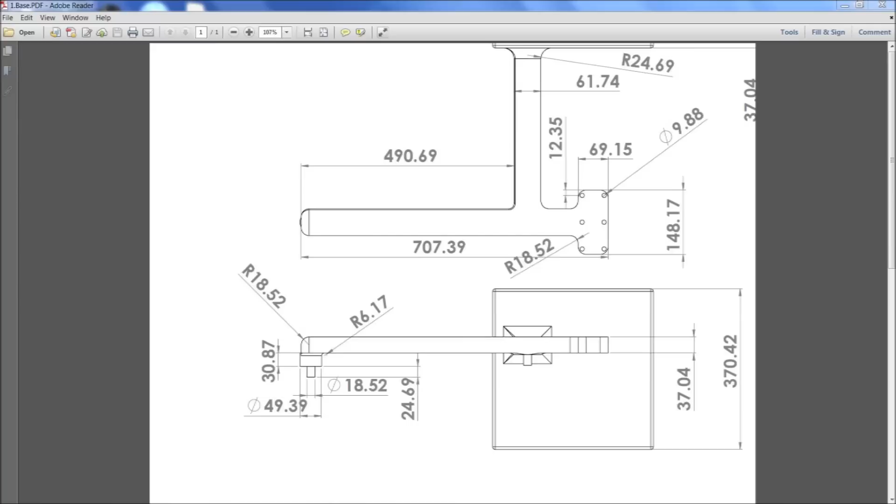Now we will sketch the first part of the 4-bar quick return mechanism, the base. First we will sketch the base here. Choose front plane, sketch, and select center line. Keep the height and width 300 by 300. Extrude it up to 30 mm. Now let's select fillet, keep 5 mm, select base and all sharp edges.

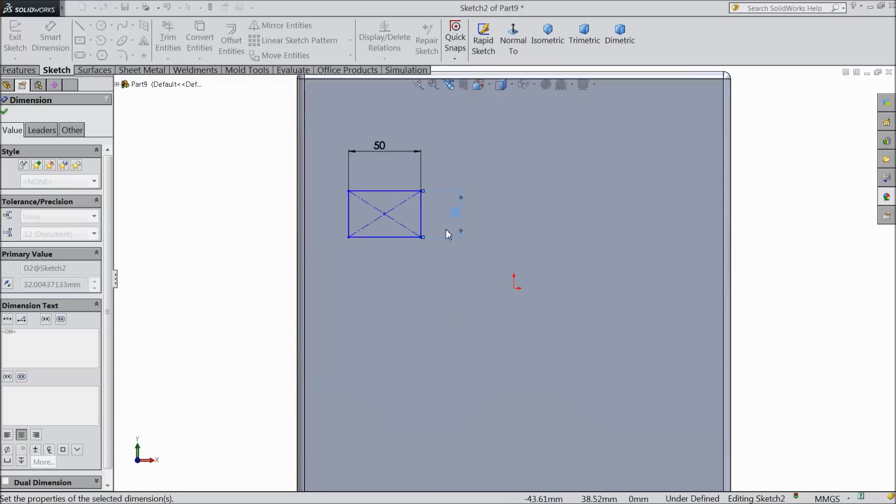Now select this face, sketch, select corner rectangle and draw one rectangle here, and assign the dimension, make it 50 by 30 mm. Assign the distance 60 mm from the origin point, and vertical distance 30 mm. Extrude boss up to 300 mm, we want length up to 300 mm. Let's see.

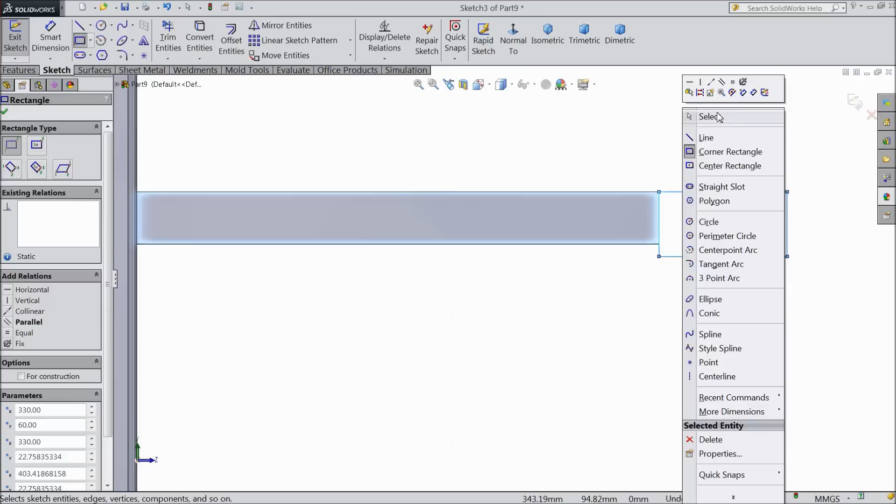Now select this face, sketch, select corner rectangle and draw one rectangle from this end. Now select this line and this line, make relation collinear. Let's assign the dimension, keep length 50 mm.

Now select extruded boss. Now in one direction, 397 and 403, and direction 2, 175.5 mm. This is our required dimension. Select OK.

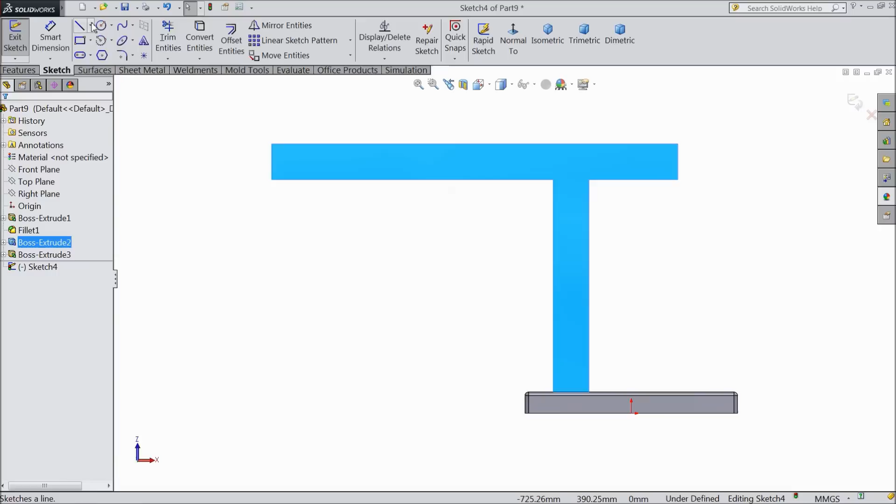Now select this face, sketch normal, select center line and find out the midpoint here. Okay, we found the midpoint, and meet up to outside, no problem.

And here also let's make a circle directly and make sure it's tangent to this line. Now assign the diameter 50 mm. Now select this outer line and circle, make relation tangent. Now extrude it up to 3 mm, only small.

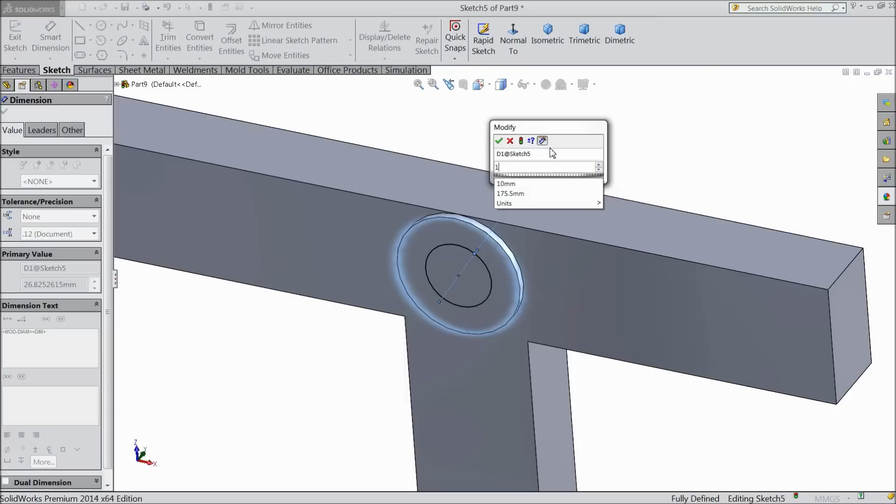Now again select this face, sketch, circle, just find out the origin point, this is the midpoint, and keep the diameter 15 mm, and extrude it up to 20 mm. This is our requirement.

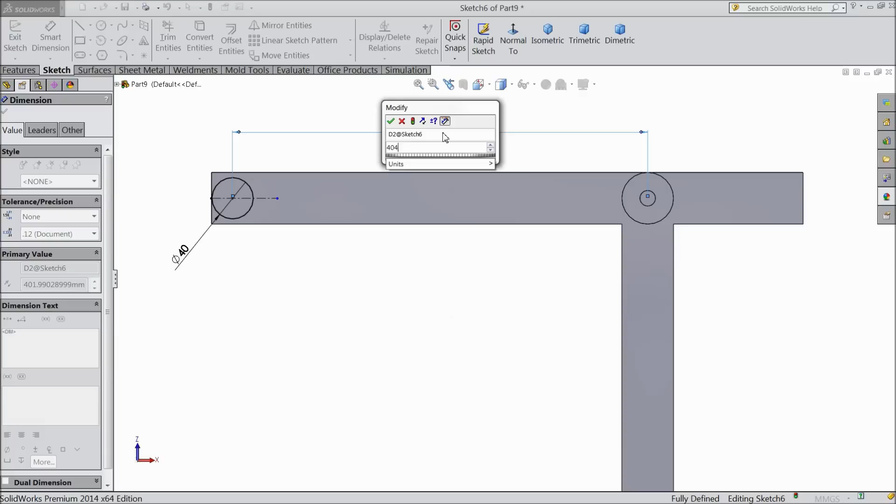Now select this face, sketch, select circle. We want to draw first, better to select a line and draw a line from midpoint, exit. Now select circle and draw a circle on this line and keep the diameter 50 mm, make it 40 mm. And make the distance 404.403 mm. This is our required dimension.

Let's extrude it up to 20 mm. Edit this feature and make it 25 mm.

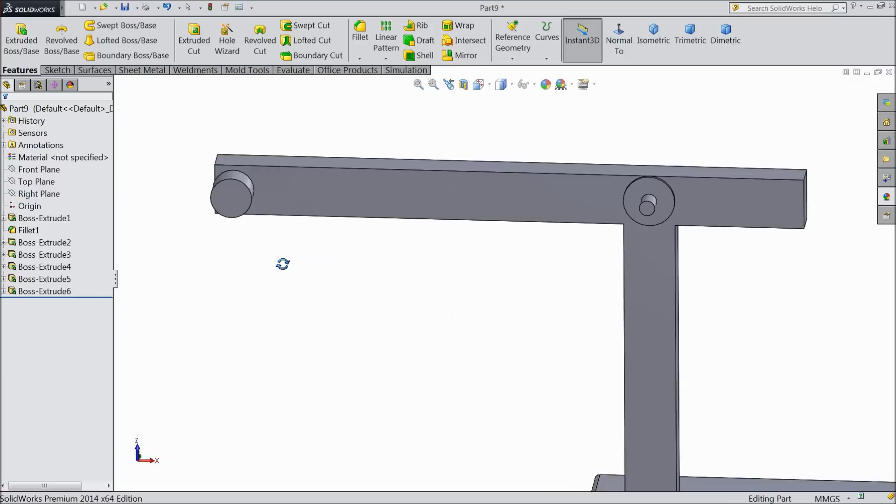Now select this face, and here we want to draw one extrude body. Keep the diameter 15 mm and select extruded boss. Extrude up to 20 mm.

Now select this top face, sketch normal, and here we want to create one corner rectangle up to this, and make the length 56 mm and width the same, 30 mm. Let's extrude it, and extrude up to 35 mm.

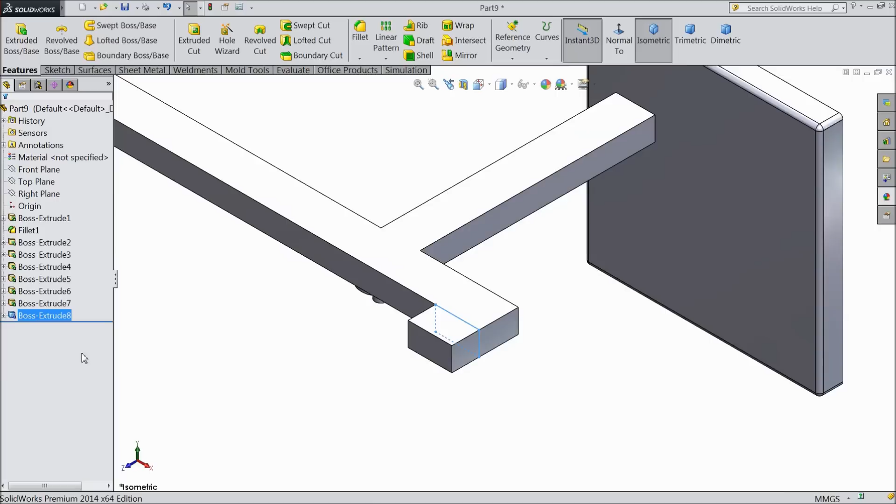Now select the same rectangle, again choose extruded boss, select offset here and make offset 50 mm reverse direction. Extrude 35 mm reverse direction. Now you can see it's going to extrude from this face. This face is created.

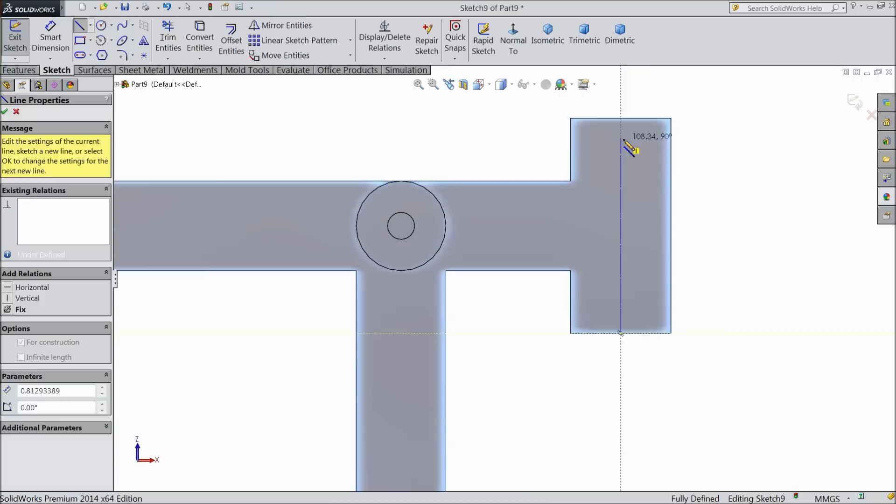Now select this face, sketch normal, draw center line first, assign the length 10 mm.

Let's make two circles. Keep diameter 8 mm. Now mirror this circle to the opposite direction. Now assign the center distance, let's make it 41 mm. Now choose linear pattern, select both the circles.

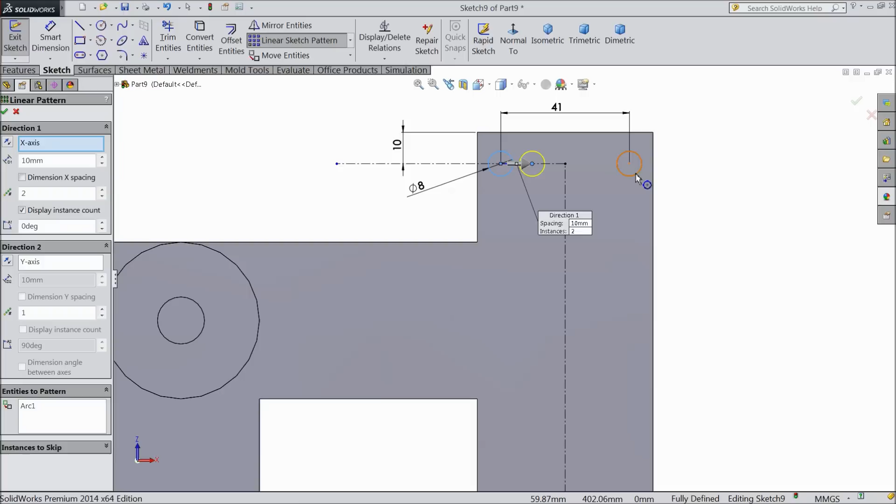X-axis keep 0, Y-axis make distance 50 mm, 3 numbers, and choose reverse direction. See, you can see here reverse direction, 50 mm the center gap, and 3 numbers. Let's cut it. We want to make a hole, so choose up to next. Now see the holes are created.

Choose fillet, select 10 mm and select all the edges. Just move and you will see the direction. That's it.

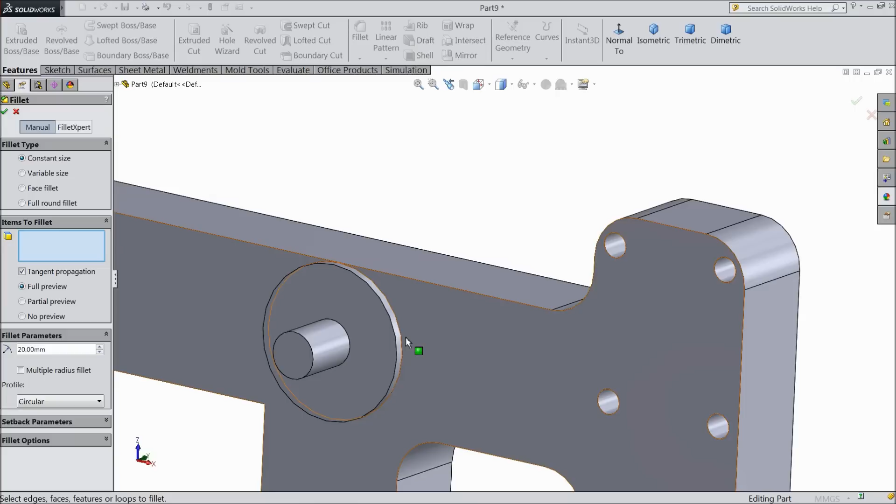Select 20 mm and select this edge. Again choose, make 20 mm and select this edge. Next opposite direction, see all four sides.

Again choose fillet, and this time select 5 mm and select this face.

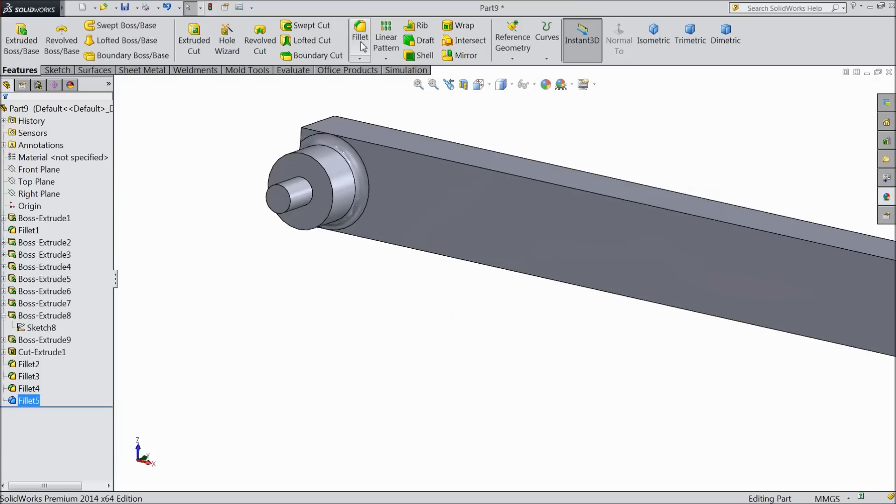And again choose fillet, keep 2 mm. Select 10 mm and select this edge also.

Keep 2 mm, select this edge and select the next opposite edge. Now we will select this edge, so keep 15 mm. It is not suitable for this face, so just select the edges.

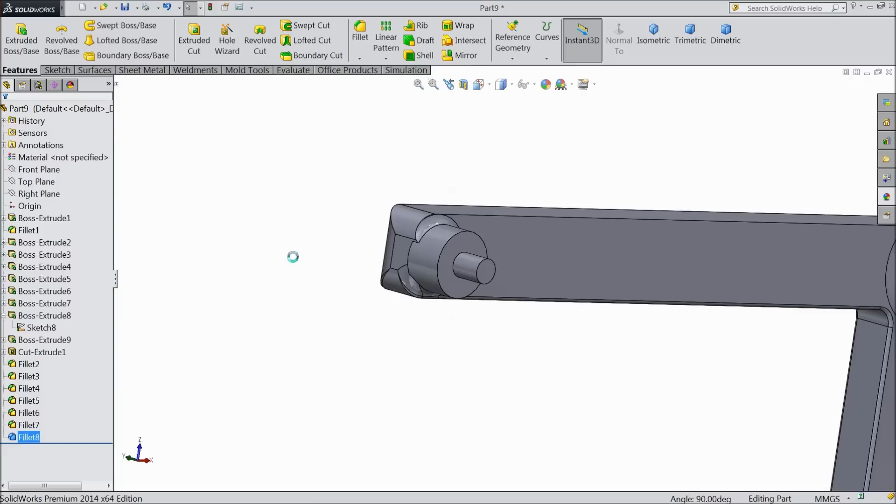Okay. That's it. So now this is our body for the 4 bar quick return mechanism. Let's add color so it will be easily identified. Okay. Now see, this is the body for the mechanism.

Now let's save as, create a new folder on the desktop, new folder, 4 bar quick return mechanism. Now save the first part as base. Okay.

Now before moving to the next part, we want to rescale because this is not the exact dimension for our project. Let's go to insert feature and make scale. Choose centroid, uniform scaling, and the scale is 1.2347.

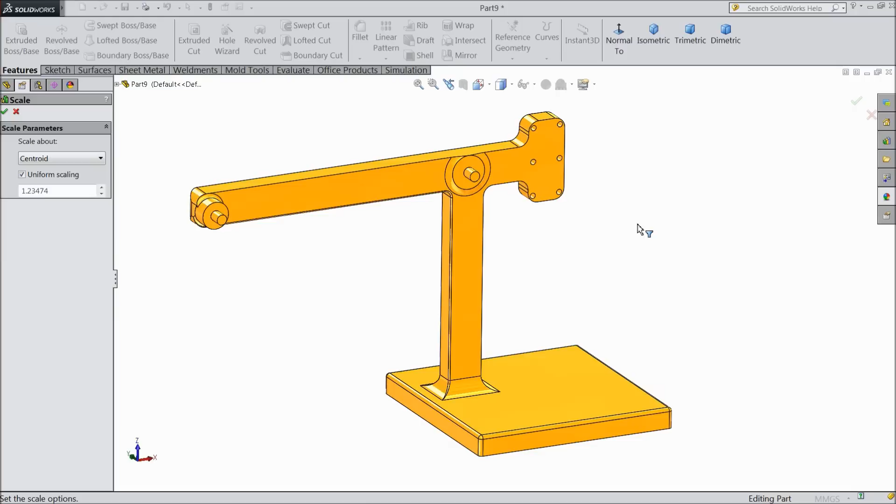Why do we keep this? If we don't, all dimensions will be in decimal points, so it is difficult to calculate every time. Okay, now save it. So now our geometry is scaled. Let's move to the next part.

Let's make the second part of the 4 bar quick return mechanism, the cylinder. Choose front plane, sketch, and for the cylinder we will first draw a circle and make the diameter 80 mm. Okay, and let's extrude it. Extrude up to 260 mm. This is the length of our cylinder.

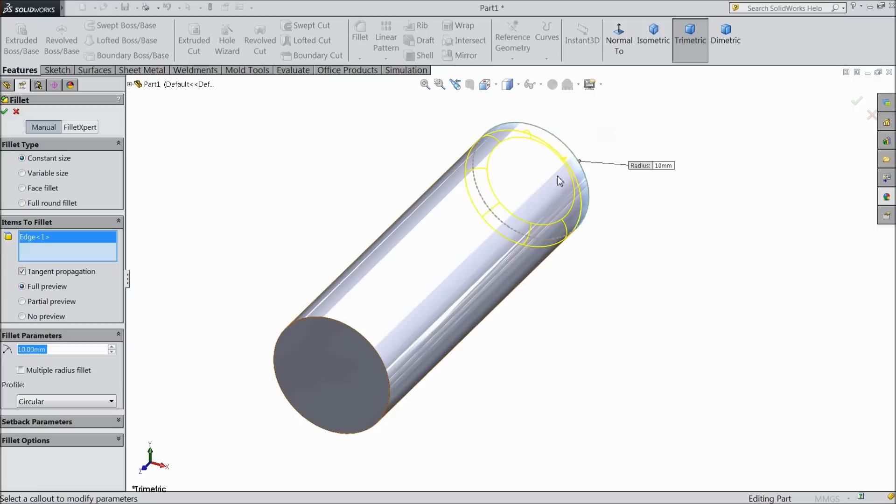Okay. Now choose fillet. Keep 10 mm and select the back surface only. Okay. Now we will choose shell. Keep 2 mm thickness. Select the front face. Okay. Now this is our cylinder. We will make it transparent. Or save it as it is.

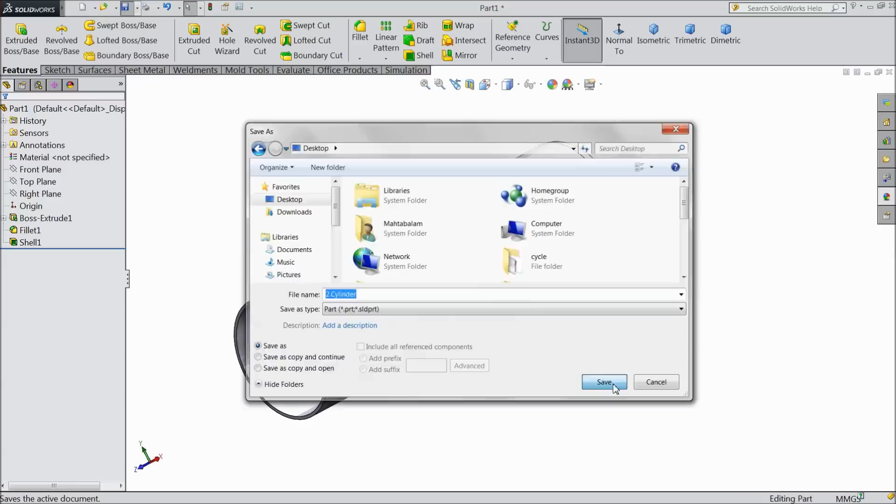Cylinder. Cylinder, this is part 2. Okay. Now let's go to the next part. In assembly we will make it transparent.

We will make the third part, the flywheel. So select front plane, sketch, draw a circle, select this inside circle, construction geometry, 140 mm and the gap 6 mm. We need this circle inside. Select extruded boss and choose mid plane 20 mm.

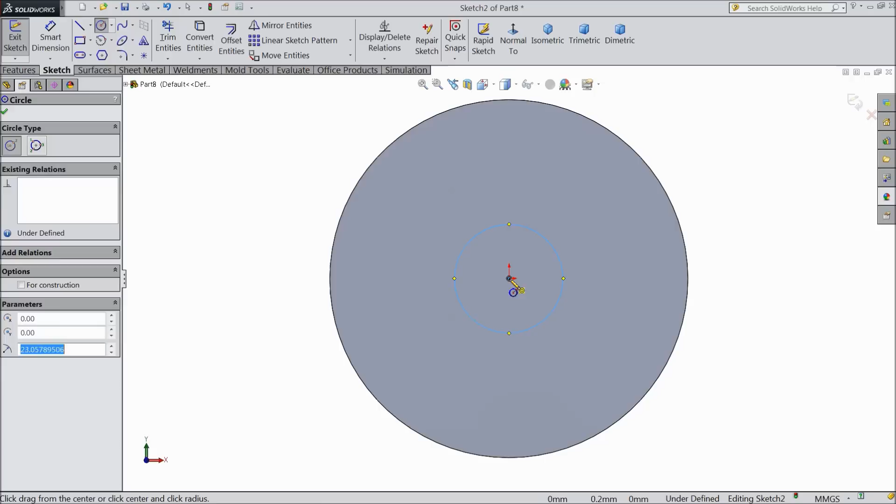Okay. Now select this face, sketch, normal. Draw two circles and keep the diameters 128 and 40 mm. Now select extruded cut. We want to cut inside up to 5 mm. Okay. Now just mirror this cutout. Select mirror and mirror about the front plane. It's going to mirror this.

Select this face, sketch, and draw one circle here and make the diameter 15 mm. Okay, and cut. Let's cut through all. Okay.

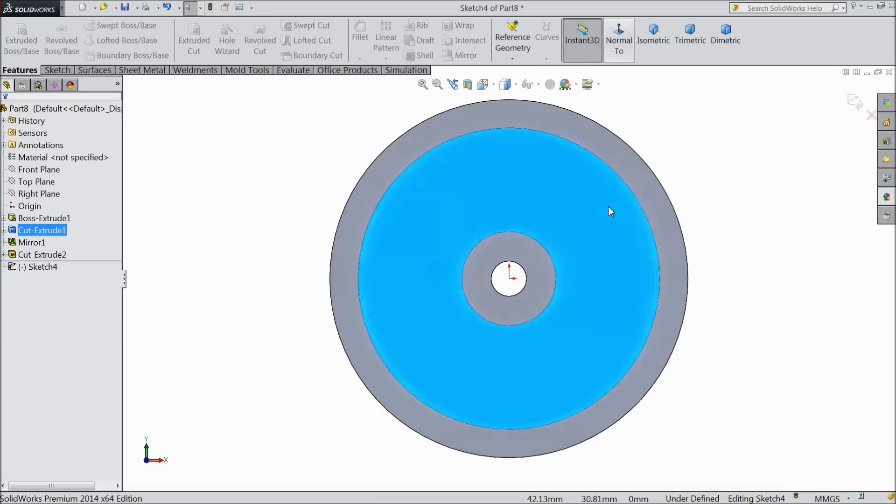Now select this face, sketch, normal. Draw a vertical center line. Select circle and draw two circles. Make sure it is tangent with this, and here also make sure it's tangent. Exit. Now let's add dimensions. Keep the small diameter 12 mm and the bigger one 24 mm. Okay. Now select this circle and this circle, make relation tangent.

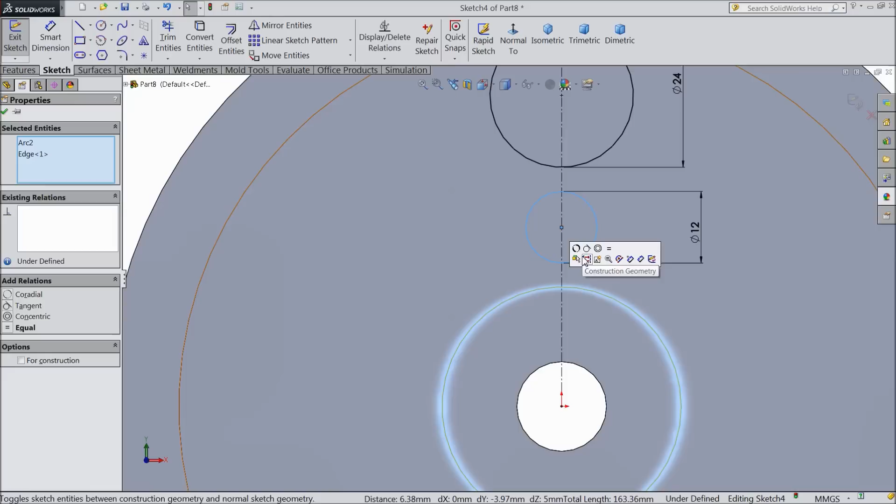Just like here, it's okay, it's coincident, or you can make the relation tangent. Okay. Choose a line and connect with this line. Exit. Select this point and this line, make relation tangent. It's already tangent. Here also it's tangent. So choose trim entities. Select these parts. Okay, let's mirror first. Mirror this line to the other side. Okay. Now choose trim entities and trim these outer lines.

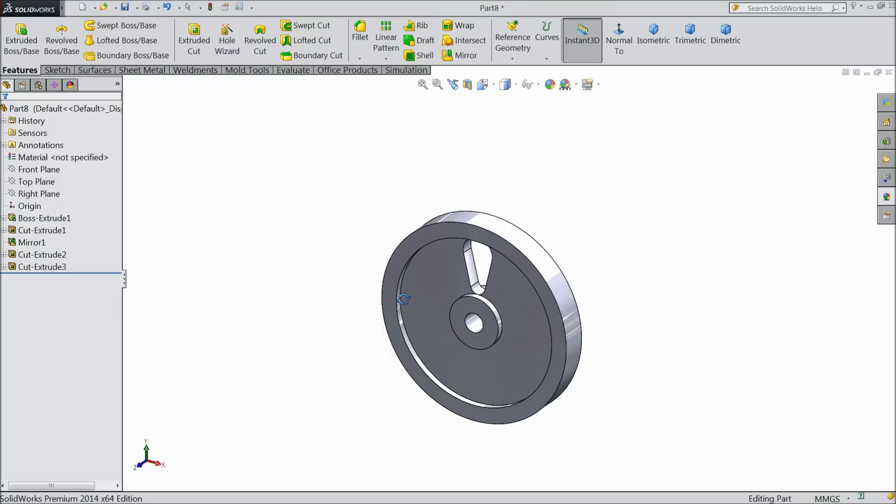Okay. Now let's extrude it. Extrude cut and choose up to surface. We will select the back surface. Okay. Now we will use circular pattern to make many copies. Select this cutout and select any axis, this axis. We want 8 numbers. Okay. Now see.

Now choose fillet. Keep 5 mm and select this edge and the same in the opposite direction. Okay. Now again choose fillet, keep 2 mm and select, okay, let's select this mid. So it will select through all. Okay.

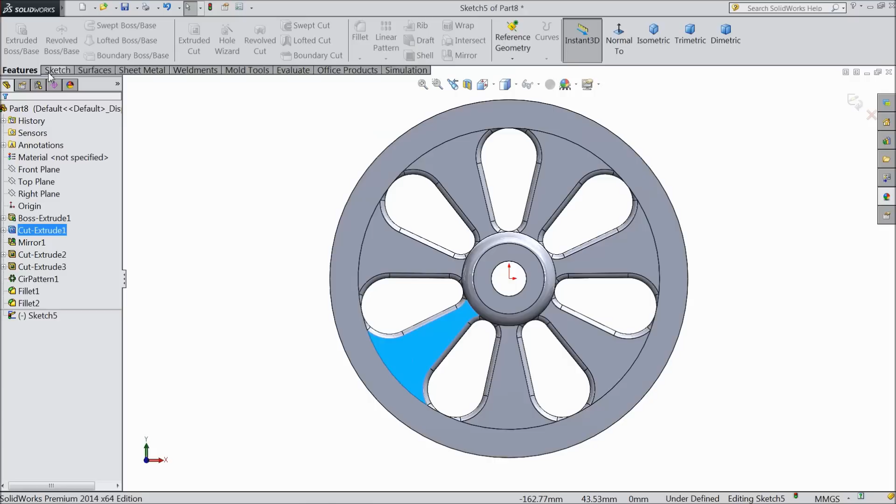Now select this face, sketch, normal, and we want to extrude something here at this angle. Select center line and draw one center line. Exit and let's make the angle 12.5 degrees, or make it 12 only. Okay. Now select circle, draw one circle and keep the diameter 50 mm and make the center point from origin

80 mm. Okay. Now select this circle and choose convert entities. Choose trim entities, delete the outer circle, then delete this line. Now this part we want to extrude, and select up to surface. Select this surface. Okay. Now see here.

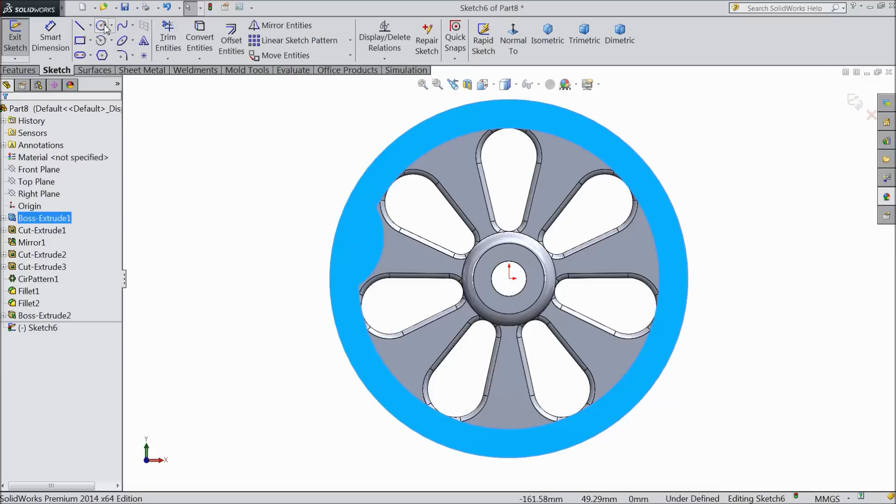Select this face, sketch, normal. The same, draw one center line and make the angle 12 degrees. Draw a circle here and make the diameter 11 mm and the distance from the origin point 70 mm. It's quite outer, so make 65. Actually we need it outer, so better to make 70 mm.

Okay, and extrude it up to 22 mm outside. Okay. Choose fillet, keep 2 mm. Select this outer face, this inside line, and the same in the opposite direction also. Okay. Now our flywheel is ready.

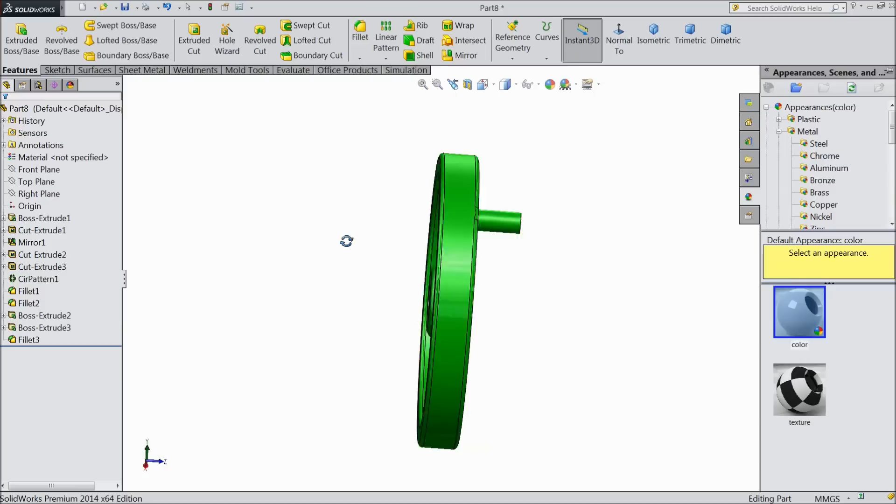So just assign some color to this flywheel for identification. Okay. So this is our flywheel. Now save as part number 3, flywheel. Okay, and don't forget to scale it. Scale the whole geometry 1.2347, centroid. Okay, now save it. Let's move to the next part.

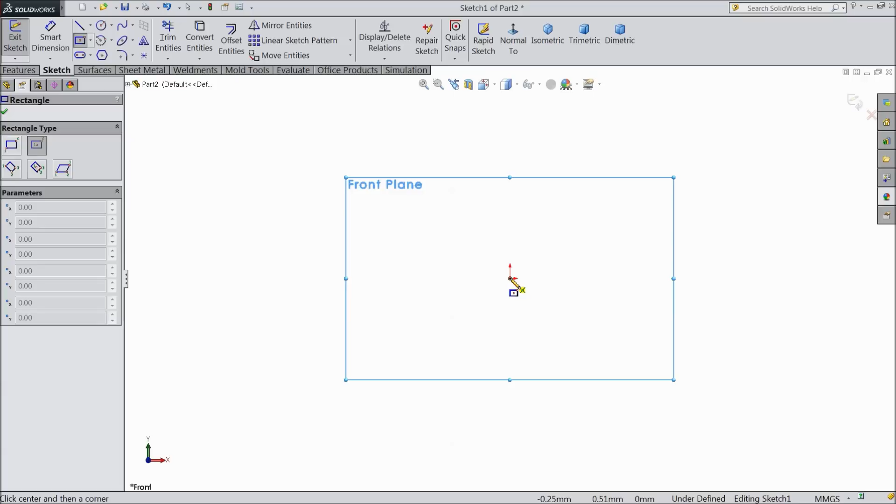Let's make the slider for the mechanism. Choose front plane, sketch, and draw one center rectangle and keep the horizontal length 15 mm and the vertical 11 mm. Now select circle and draw one circle at the midpoint. Keep the diameter 7.5 mm.

Okay, now let's select extruded boss, first choose mid plane and extrude up to 15 mm. We want 15 mm length. Okay, now choose fillet, keep 0.5 mm and select all the edges.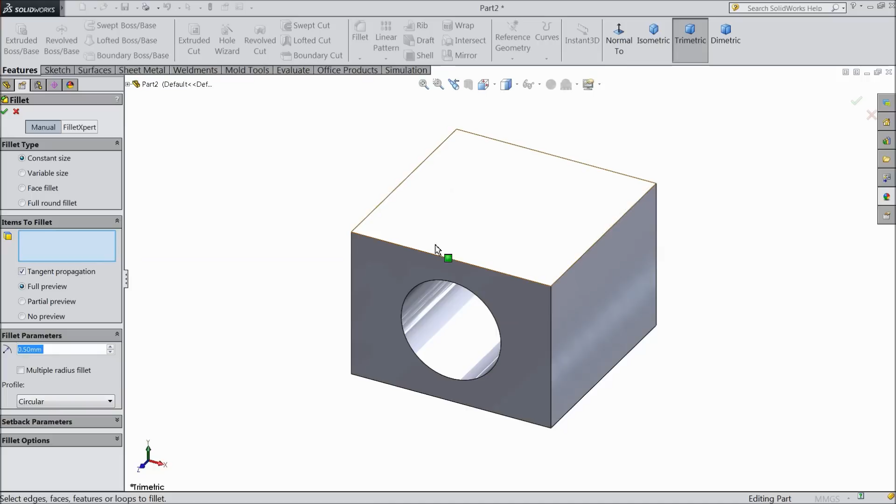Okay, now we will scale it, because for our mechanism this is not the exact dimension. We want it a little bigger, so just avoid point dimensions. Just go to Insert and we will find Scale. Choose centroid, uniform scale. Now we want to make it a little bigger, so select 1.23474 mm.

Okay, that's it. Now let's add some color so it will be identified while we are doing the assembly. Give it brass. It is quite okay. This is better. Now save as slider. Okay, now let's move on to the next part.

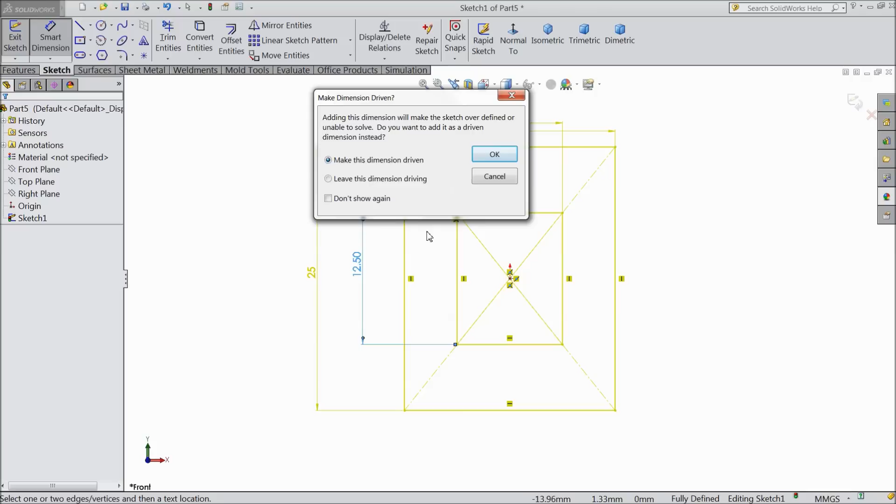Now we will make the next part, the slider slot. This is the fifth part. So choose front plane, sketch, select center rectangle and draw one rectangle. Draw two rectangles actually. Let's assign the dimensions: 20 by 25 mm, 10 mm, cancel it, and remove this geometry. 15 mm. That's it. This is our requirement. Okay.

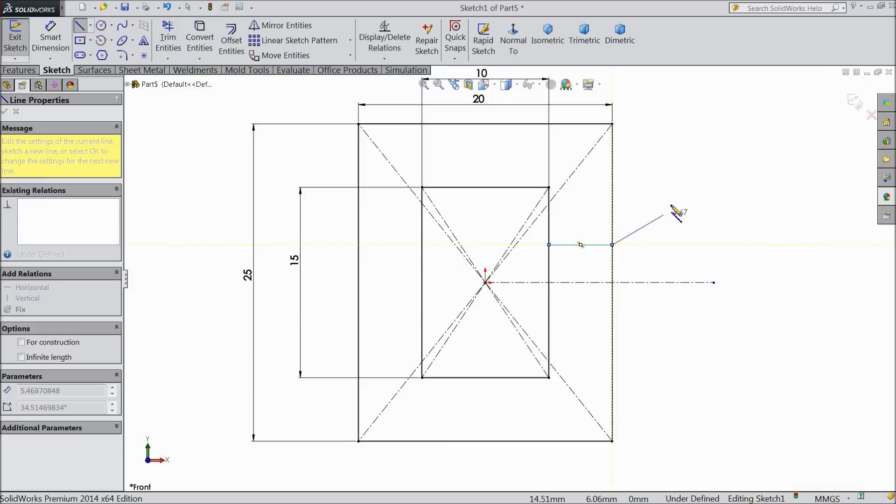Now choose line, center line, and draw one horizontal line. Make sure it is horizontal. Okay. Now connect a line from this point to this point. Exit. Now let's define the gap: 3.75 mm. Select mirror and mirror this line about this construction line. Choose trim entities and delete these inside lines. Now this is our required shape.

Let's extrude it. Select mid plane, and the length we want is 200 mm. Okay. We will assign some color. Okay.

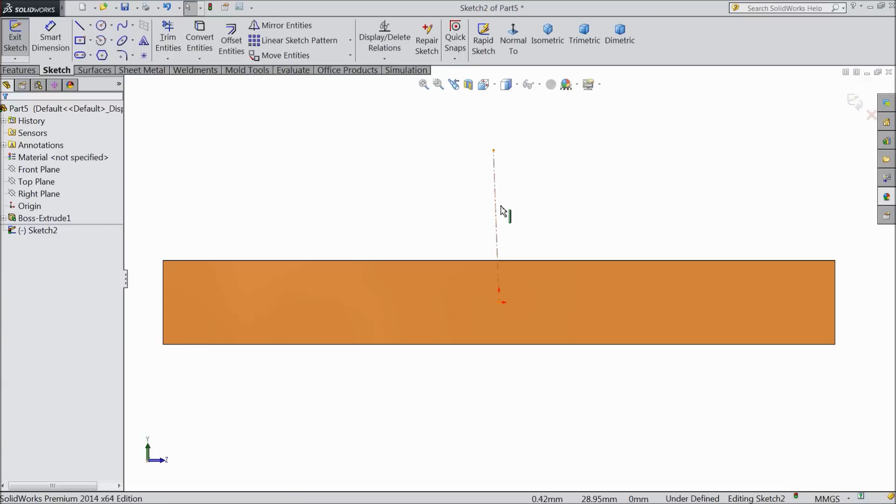Select this back flat surface, sketch, and here we will create some geometry. First draw a center line. Make sure it is vertical. Select corner rectangle, not center. Exit. Now select these outer lines, this line, center line and this line, and make the relation symmetric. Now let's make the dimension 15 mm and keep the height 8 mm. Okay. Select this line and choose it as construction.

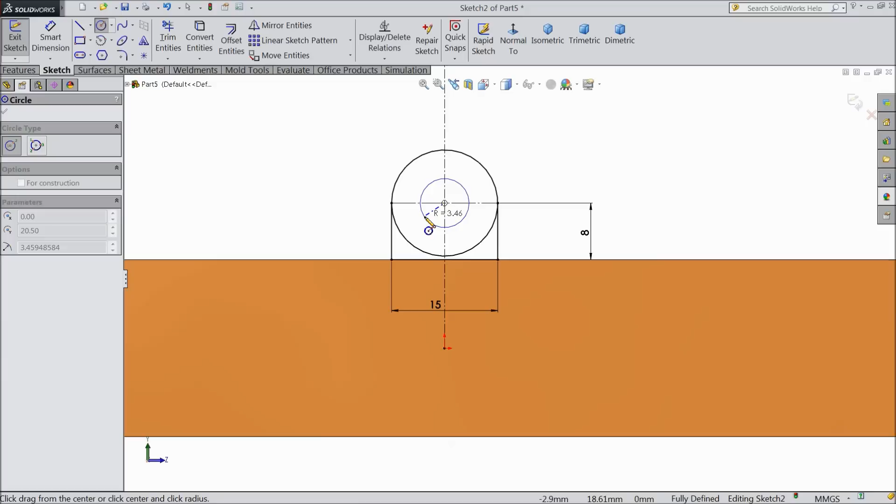Circle: draw a circle up to this line, again draw one more circle, and keep the inside circle diameter 8 mm. Okay. Select trim entities and delete these inside circles. Okay. Let's extrude it. Extrude up to 10 mm, but make sure it is in the reverse direction. Okay.

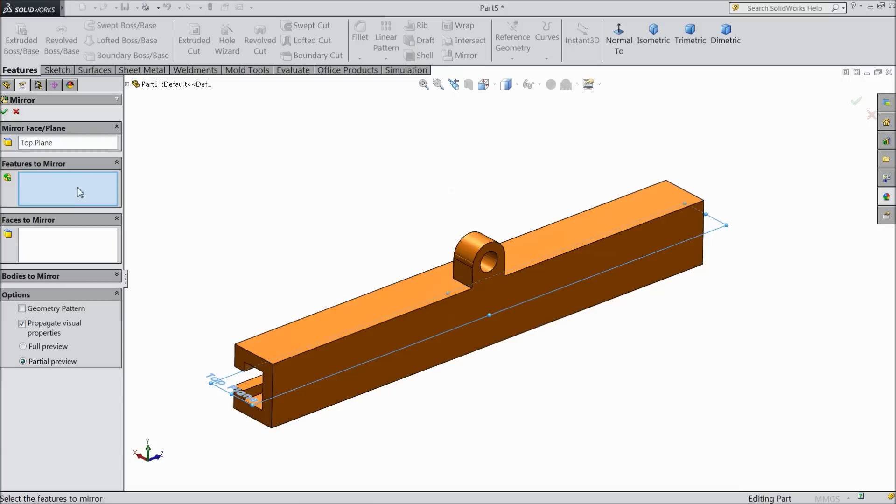Now choose top plane, and we want to mirror this extruded part. So select mirror and select here our Boss-Extrude2. Okay. Now select linear pattern. Select this axis. We want 50 mm, two instances, Mirror 1. Select OK. Again choose linear pattern. Select this axis and here clear. Select Mirror 1, reverse direction, 50 mm, two instances. Select OK. Now see, this is created.

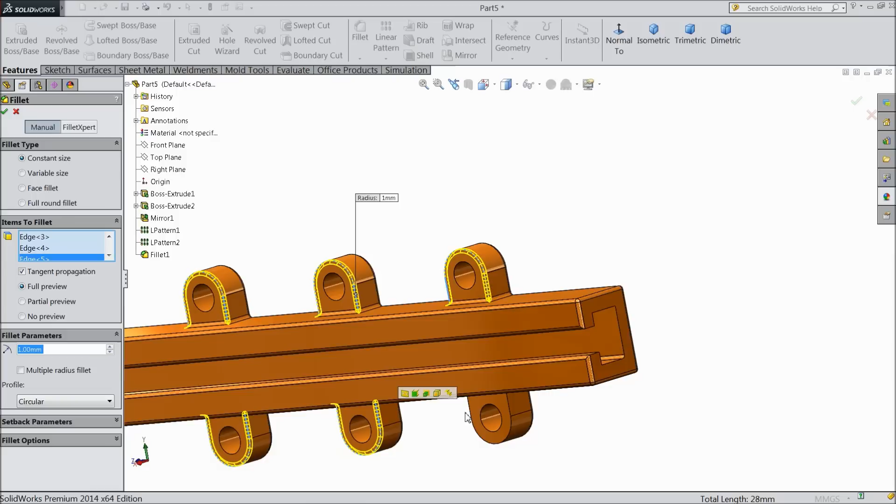Now let's select fillet, keep 1 mm and select all the faces. We want this face, this face, we want both front faces. Select OK. Again choose fillet, make it 1 mm and this time select all these edges. Selecting only edges or not, it's up to you.

So this is the slot for the slider's movement. The slider will move inside this slot. So just save it: slider slot. Okay. Now we will rescale this. Keep 1.23747. This is our standard uniform scaling. Okay. Now save. Let's move on to the next part.

Now we will sketch the sixth part of the mechanism, the ram. So select front plane, sketch, choose corner rectangle, draw one rectangle and keep the dimension 10 by 15 mm. Okay, and extrude it. Keep mid plane. And make the length 400.36 mm. This is our requirement. Okay.

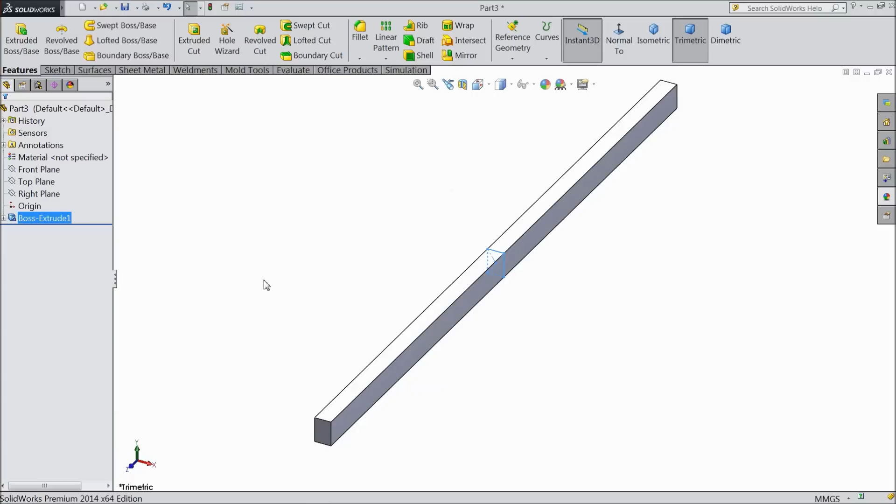Now select this face, sketch, normal, and here we want to draw one circle. So just draw one circle from the midpoint. Keep the diameter 7.5 mm and extrude it up to 30 mm only.

Okay. Now we want to scale it. This is not actually our scale. So just go to Insert, Features, Scale and make it 1.23747 uniform scaling. Okay. Now it's getting a little bigger.

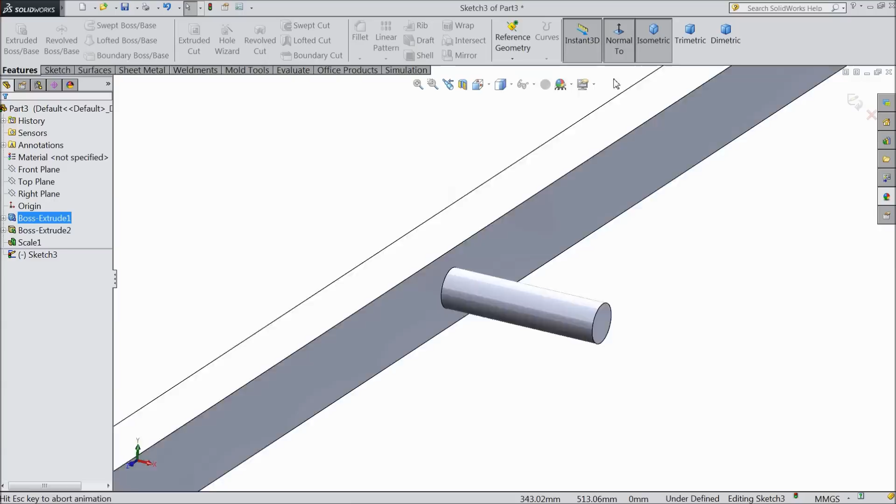Now select this face, sketch. Now here we want to create one circle and keep the diameter 76 mm. Okay. Now let's extrude it. Extrude up to 20 mm. Okay. That's it. Select front plane. Let's mirror it. Mirror, and select this extruded component. Now it's going to be mirrored here. Okay.

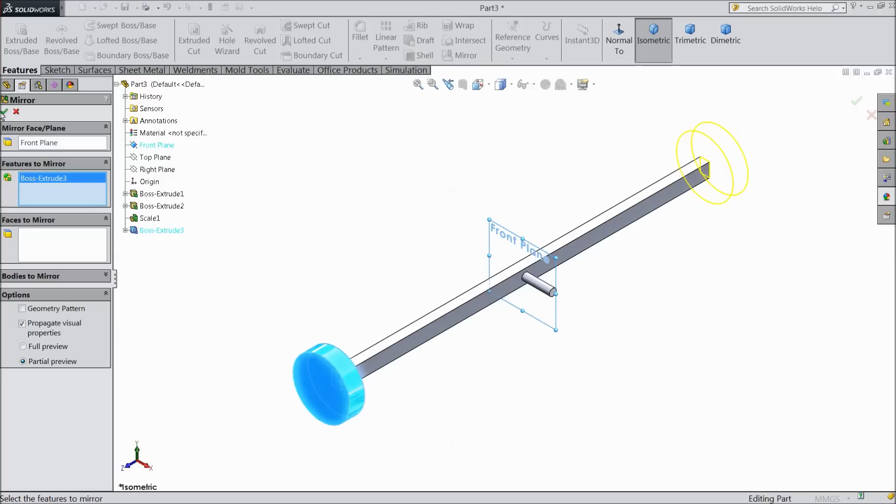Now let's assign color to the whole geometry. We will assign a better yellow color. Okay. So now this is the ram. It will move inside both the piston or cylinder. It works as a piston. We will see in the assembly. Now save as: part number 6, ram, four-bar quick return mechanism, save. Let's go for the next part.

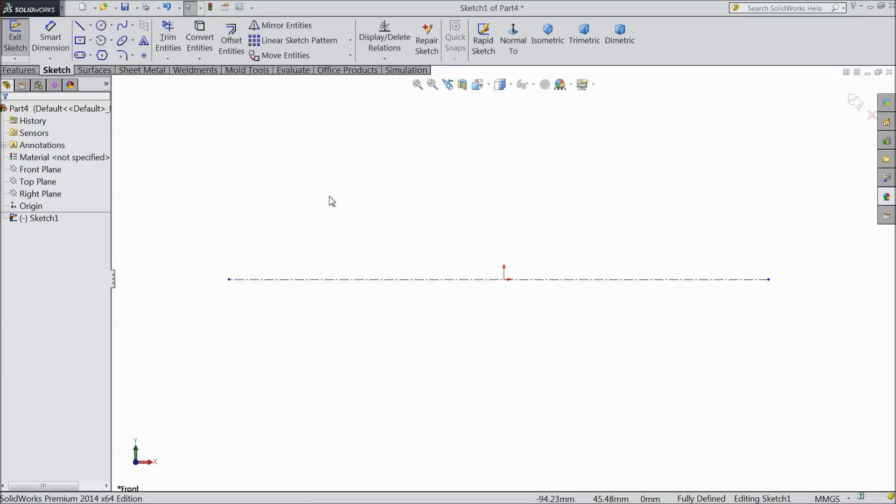Now we will sketch part number 7, the slotted lever. So let's select front plane, sketch. First draw one horizontal line just passing through the origin point. Now select here straight slot and create one slot. Okay. Exit. Now select this line and this line, equal, meaning both slots have the same dimension and same length.

Now select circle and draw one circle and keep the diameter 30 mm. Okay. Now select a line up to here.

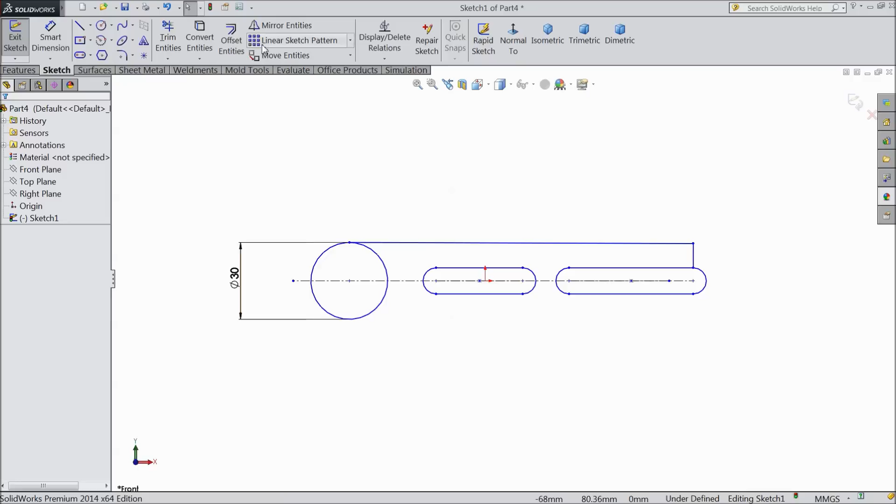Exit. Okay. Now select this line and make relation horizontal. Just mirror this line, mirror about this point, and here select this line also. Okay. Now choose trim entities. Okay, this is our exact required shape.

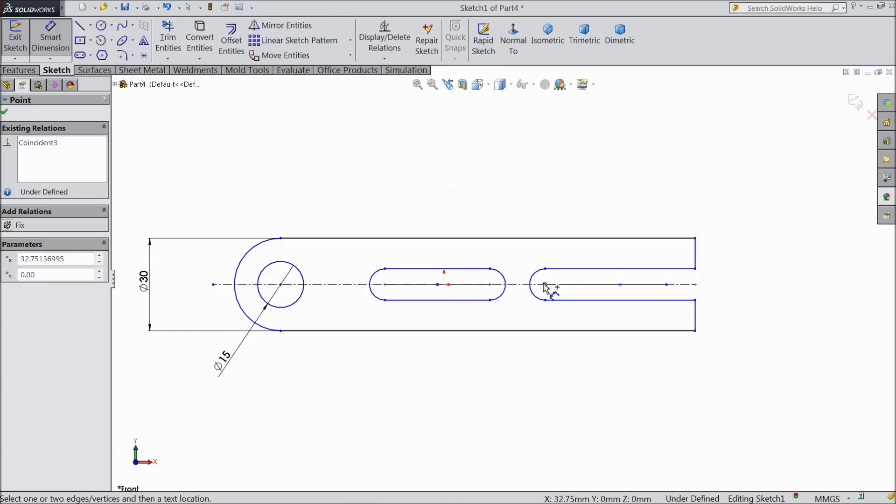Draw one small circle here and keep the diameter 15 mm. Now let's make the distance. Better first make this distance. Hundred and 20 mm. Okay.

Now this, let's make an edit. Select this one and delete it. Now let's connect it. Select this line, choose as a construction. Now draw a circle up to this point. Okay, choose trim entities and trim this outer line.

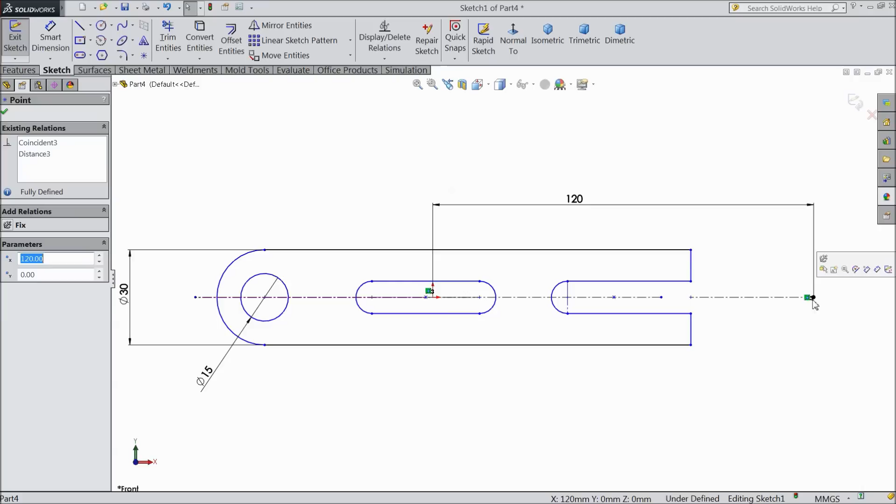Okay, now let's make the distance from, let's go inside this point. Select this point, end point, and select this circle and select here concentric. Now see. Okay, now just drag this up to here.

Now let's make the distance. From this end to origin point 450 mm. Okay, that is what we need, and make this center distance 11 mm. These two also I hope 11 mm. Okay, cancel it.

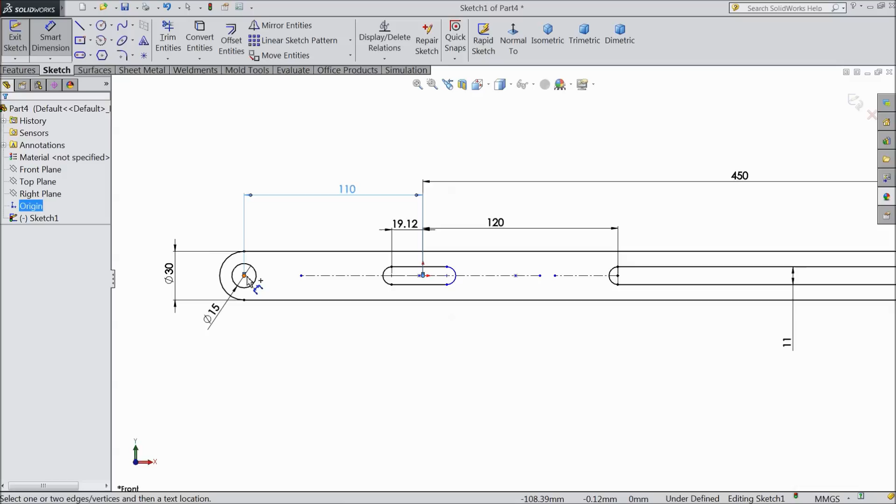Now we will assign some distance. Select this point from origin. First we will assign this point, 110 mm. Now let's assign this point. From this point, origin point, okay, this distance, modify it, keep 75 mm.

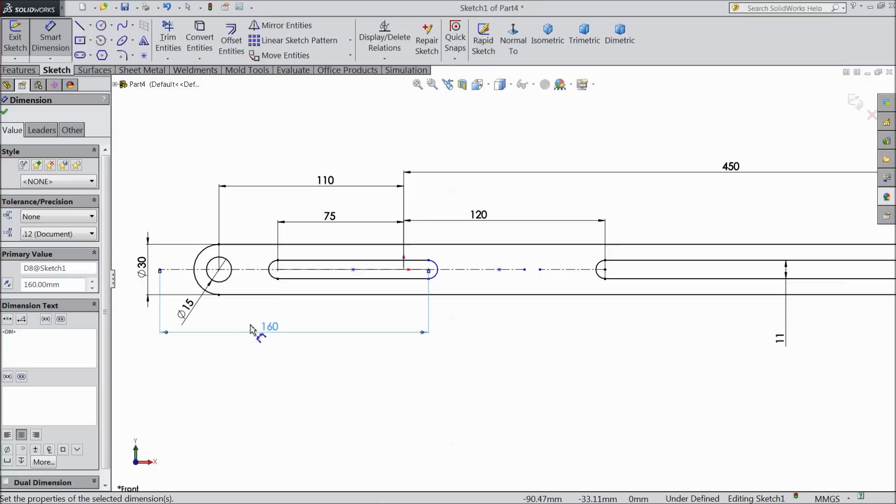Okay, and assign the overall length 100 and delete. We want the overall length this 160 mm. Okay, now I think the dimensions are enough. Okay, so let's extrude it. Up to 20 mm. Okay.

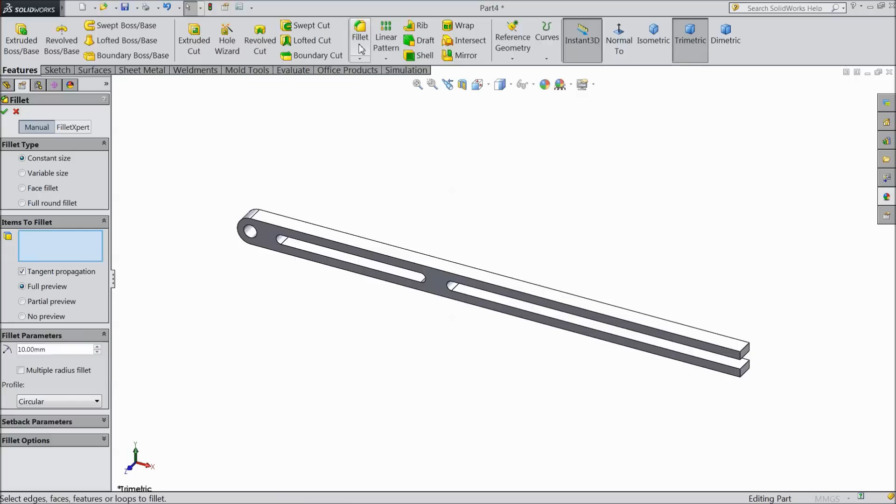Now select fillet, keep 1 mm and select both side faces so that all edges will cover. Okay, now we will scale this geometry. This is actually our system requirement. 1.23474 mm. Uniform scaling, centroid. Okay. Now let's make some color. Okay, this looks better.

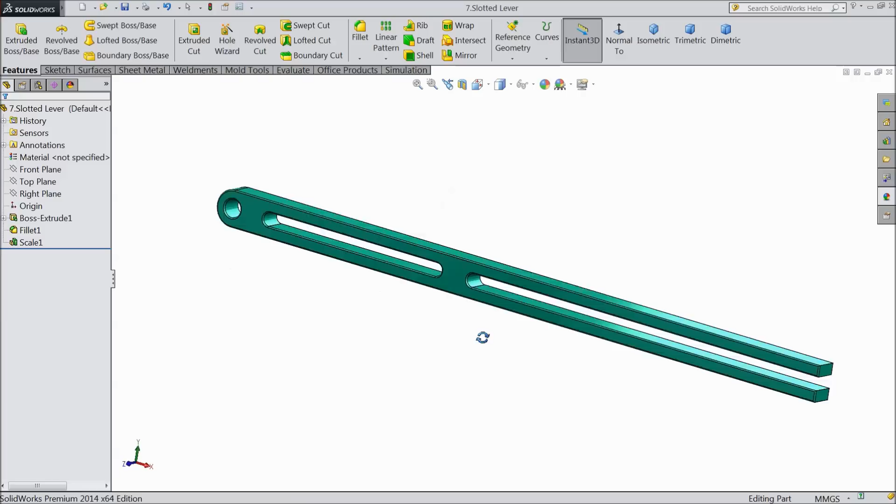Okay, now save this component as part number 7 slotted lever. Okay, now let's move for the next part. Now we will make part number 8, M8 bolt. So select front plane, sketch, select polygon and create one hexagon. Okay, select this point, vertical. Let's assign the length 16 mm. Okay, and extrude it up to 6.4 mm.

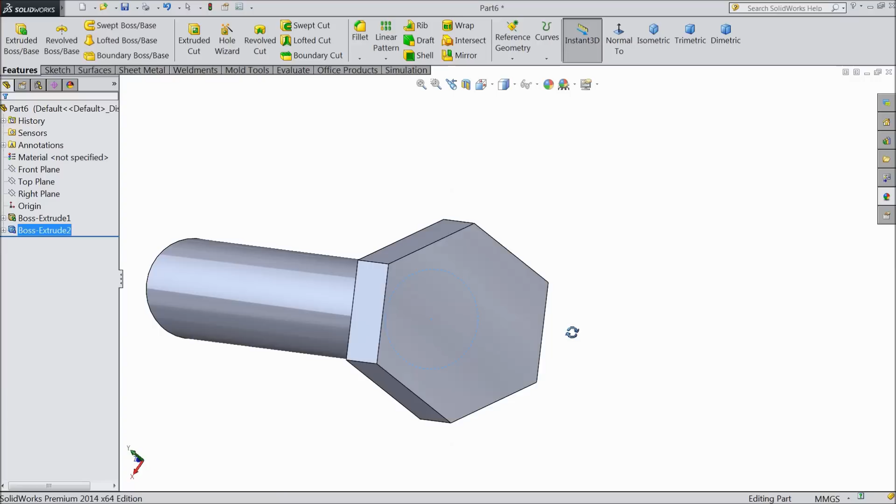Okay, now select this face, sketch and draw one circle here and keep the diameter 8 mm. Okay, and extrude it up to 50 mm. This is the length of bolt. Okay, select top face of head, sketch, select a circle and draw one circle and make sure it is going tangent with this outer edge.

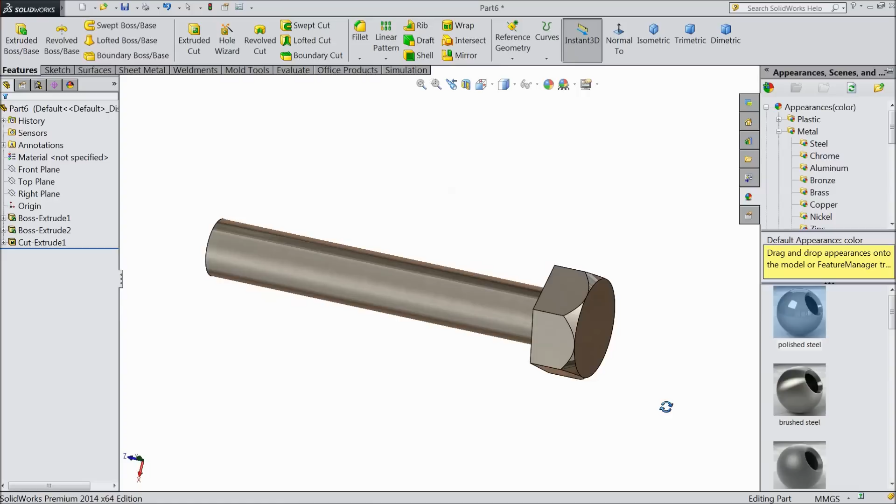Okay, now let's extrude cut. Select here flip side to cut, make 6.4 mm and keep the angle 30 degrees. Okay, now see, now let's assign the material. Polished steel. Now save as part number 8 bolt.

Now we create nut also. We forgot to scale it, so just select insert feature and scale command and scale up to 1.23474 mm. Okay, that's it. Now save it. That's it. Now let's go for a nut. Now we will create part number 9 nut, M8 nut. So select front plane, sketch, choose polygon and create one hexagon. Let's make the dimension from this point to this point 16 mm. Okay, and extrude it.

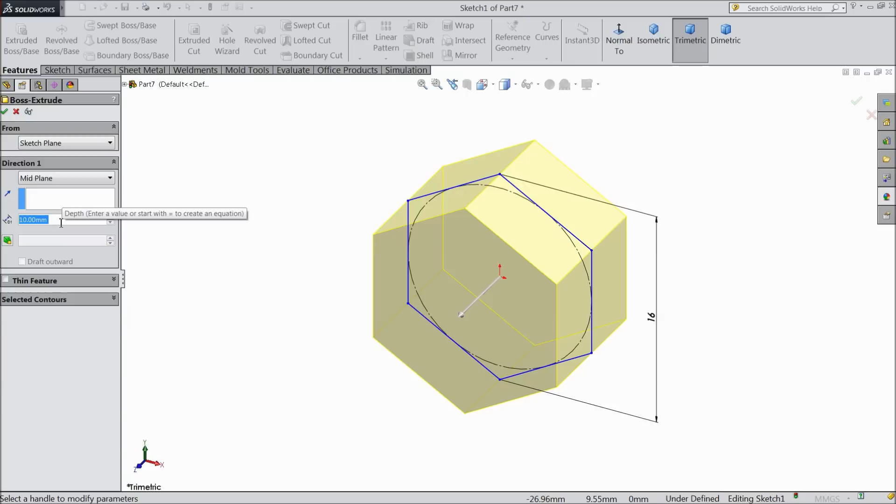Choose mid plane and select 8 mm. Okay, now select this face, sketch and draw here one circle and it is tangent with this corner edge. Okay, and let's extrude it. Keep 8 mm, select flip side to cut. We want to cut outside and keep the degree 30 degrees. Okay, see the round edges. Now we want to mirror this side to another side. So choose front plane, mirror and select this last cutout.

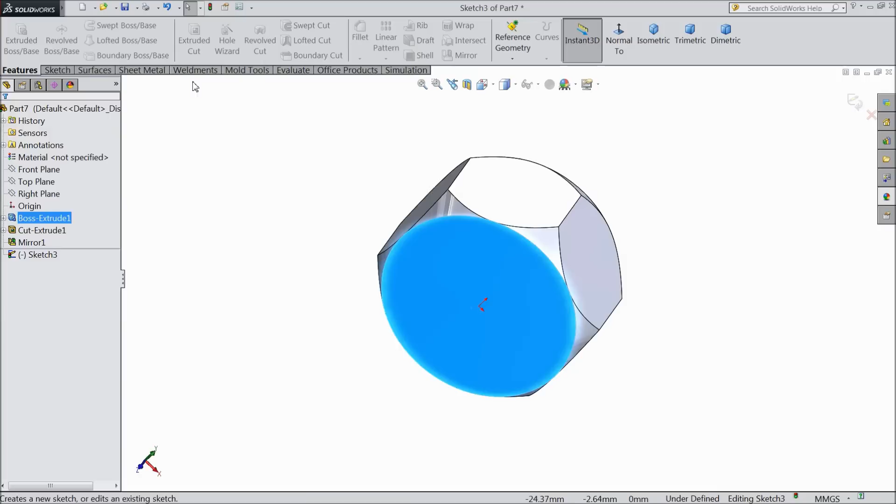Okay, now see, now let's make the hole for bolt and keep the hole dia 8 mm. This is our bolt size. Okay, choose through all. Okay, make it polished steel so it looks a nice bolt nut. Now save as part number 9 M8 nut.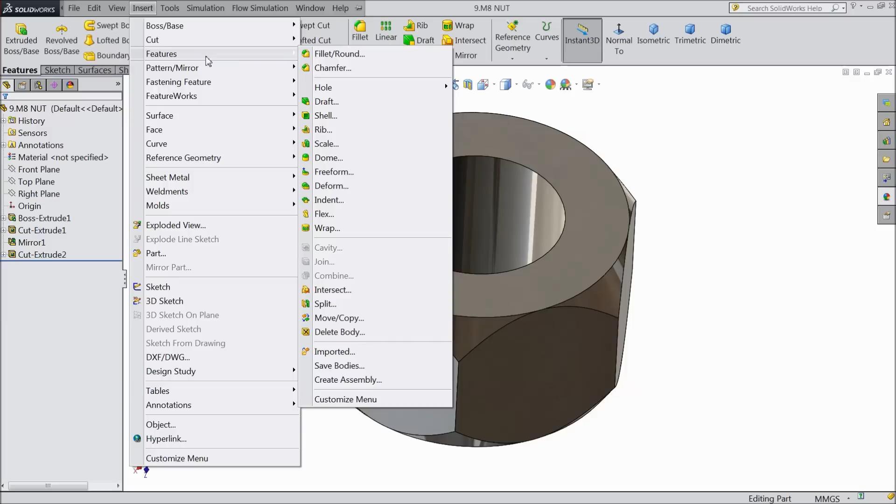Let's first scale it. 1.23474 mm uniform scaling and keep centroid. Okay, now it is scaled. Now save it.

Now we will start the assembly of 4-bar quick return mechanism. Select new part, select assembly. Okay. Now let's browse our parts. Go to desktop and open the folder 4-bar quick return mechanism. First select base part.

Okay. Now let's make the color white and define the image quality, also keep high. Refresh. Now this is our base. Now let's select next part, flywheel.

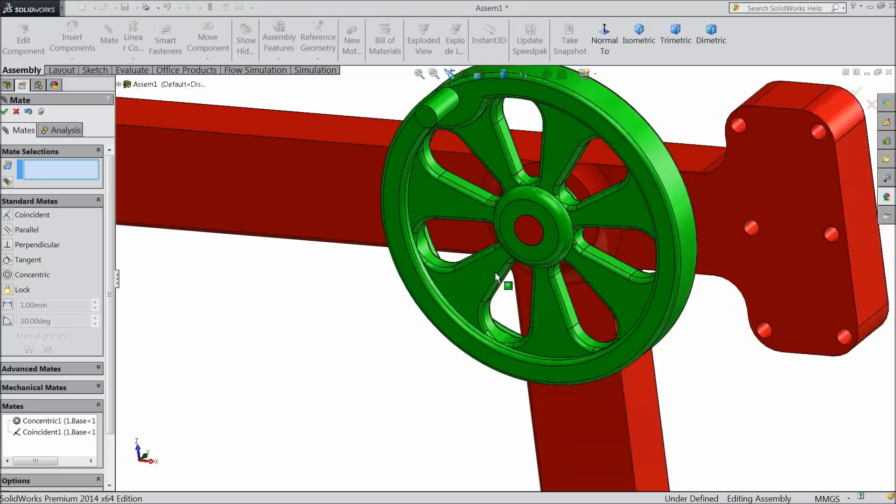Now choose mate, select this center point and this. Okay. Now select this face and this face. Okay. Okay, now it is rotating. Now we will import our next part. Let's bring this time slotted lever.

Now here select this inside hole, mate and this extruded part. Okay, select this face and this face. Okay, now it is coincident with this face. See, it is rotating. Now we will make one relation with this. Select this upper rod circular portion and select this face.

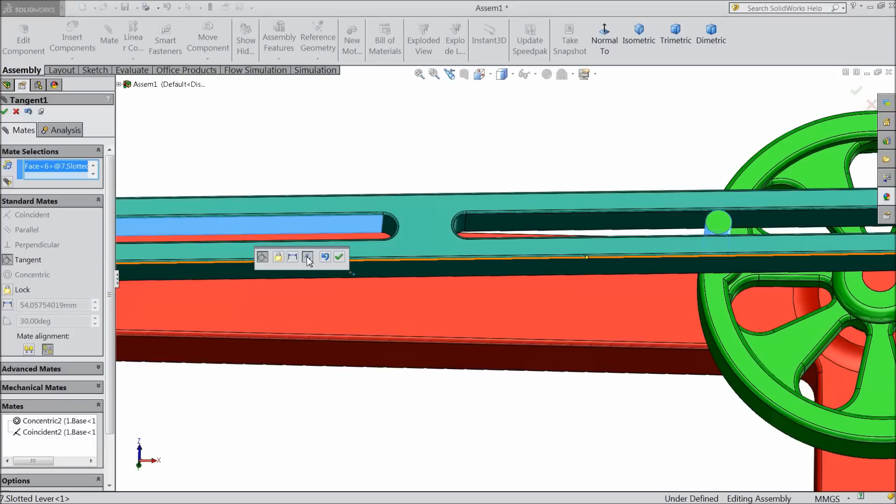Select here flip mate, choose tangent. Okay. Okay, now see how it will rotate. You can see it is rotating like this. Now let's import our next part, slider slot.

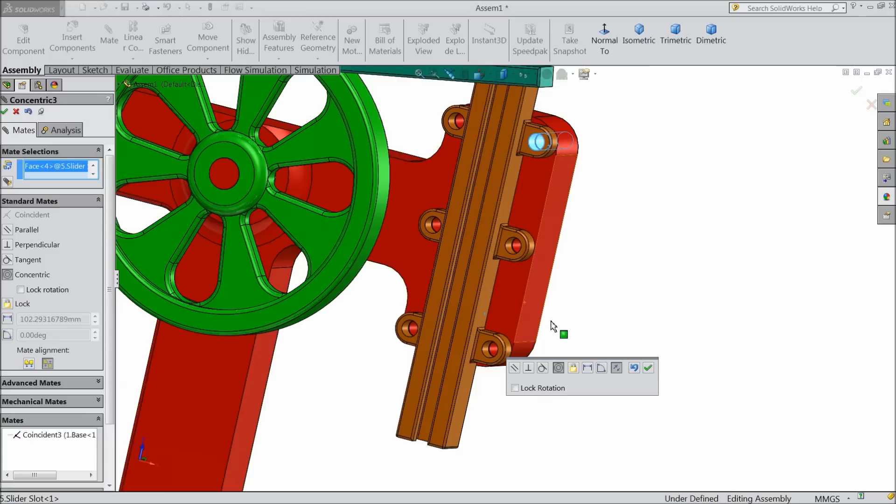Select this face, choose mate and select slider back face. Go inside. The same as here, select this upper hole and this hole. See, it's going to meet here. Okay. The same as for the next direction, this hole and this hole. Concentric. Okay. Now this is fixed, it will not move.

Now insert our next component, RAM. Okay. Just first rotate this component, so this should come forward. Now just go back, select the back face, mate, and here slider slot inside, keep mate, select this side and this side. Okay. Now see, the slider is fixed with this slot. Now it will rotate up and down.

Okay. Let's move our main part, slider. Choose mate, select this hole and this part, select concentric. Okay, just take it out. Now we will make one more relation. Let this down. Select the bottom face of slider and this face. Select here coincident. Okay, see, and we want to make one more relation.

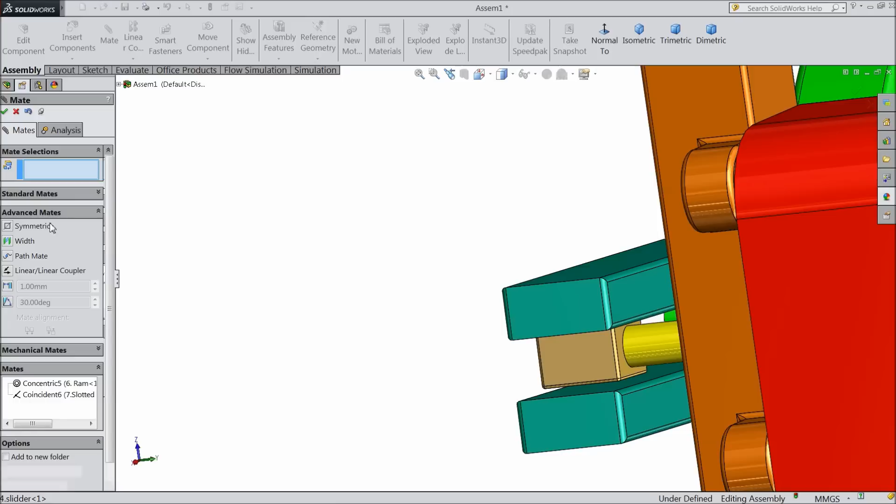Go to advanced mate, choose width. In width, select slider, first slider, both faces, then slotted lever, both faces. See, it is in center part. Select OK. OK. Now we will see whether it's moving or not. Yeah. See, it's moving. See, our return mechanism is moving.

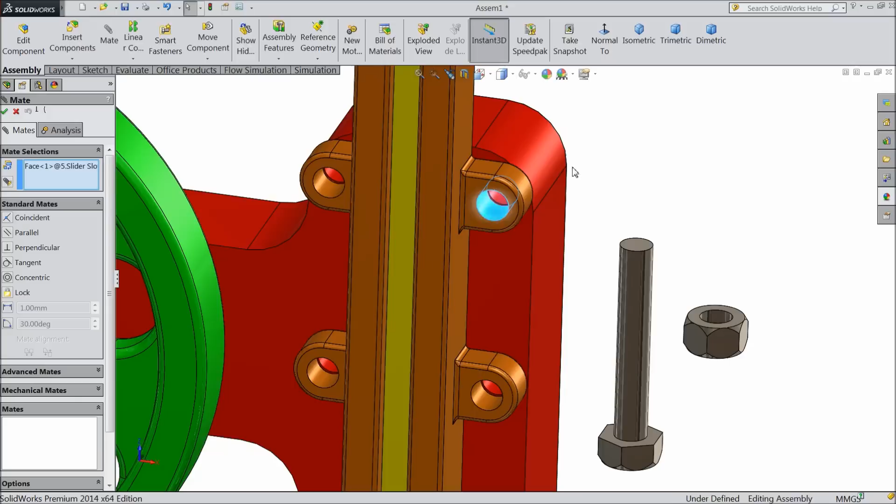Now let's bring another component. Let's select bolt and nut. Press Ctrl, select bolt and nut. Now select this hole, mate, bolt. Okay. Now select back side of head and slotted lever. Okay. Now fix nut also, select the bolt, nut. Okay. The face of nut and this body. Okay. Now we fix nut and bolt.

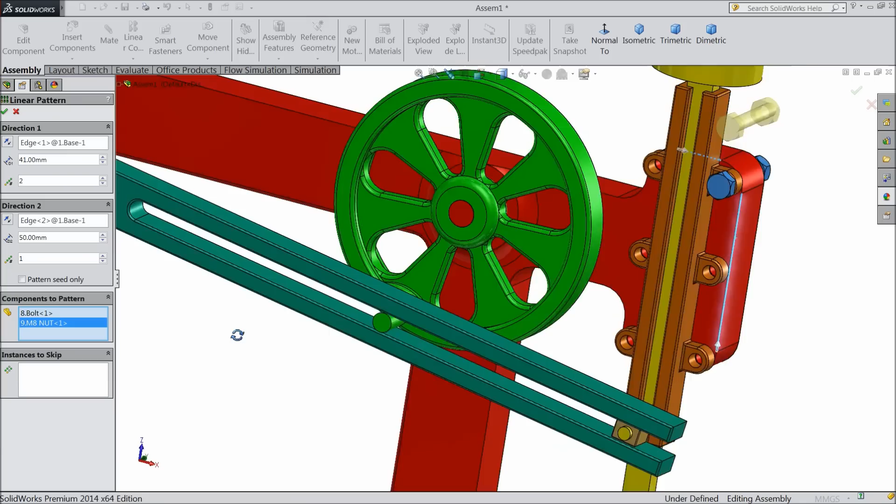We will just do one thing. We will choose linear pattern. Select this as an axis and Y axis also you can select this. Select the component, select both the components nut and bolt. X axis you can keep 41 mm. It's going down, so X axis better make 50 mm.

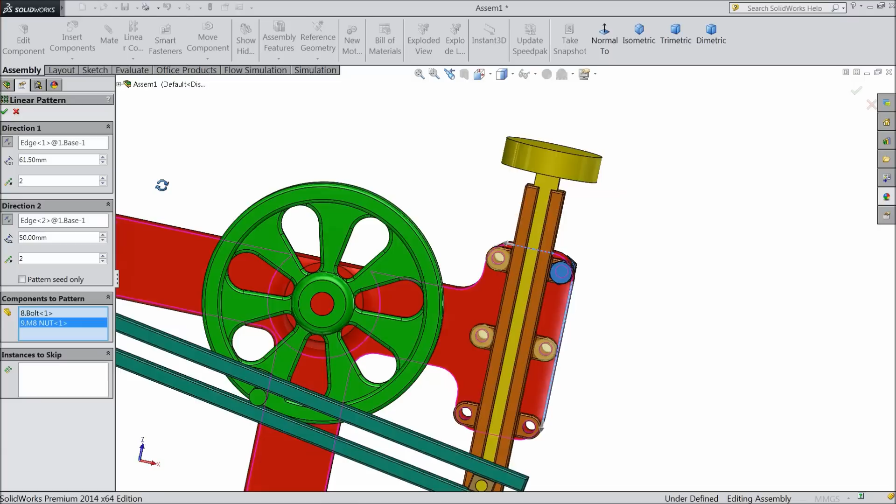No, 41 mm reverse direction. I think this is selected, so select 50 mm. I think no, select this also reverse direction. Okay, now select one item. 61.5 mm. It is going down. 61.5 mm. Select three numbers. We want three numbers. Okay. Now all our holes, nuts and bolts are created.

Now let's bring other parts. Now the balance part is only cylinder. Press Control, select the cylinder and make one more copy. Choose rotate. One cylinder rotate opposite direction. Okay. Now right click on cylinder and choose transparency. Select both transparent. Now select this cylinder, mate, and this face. Okay.

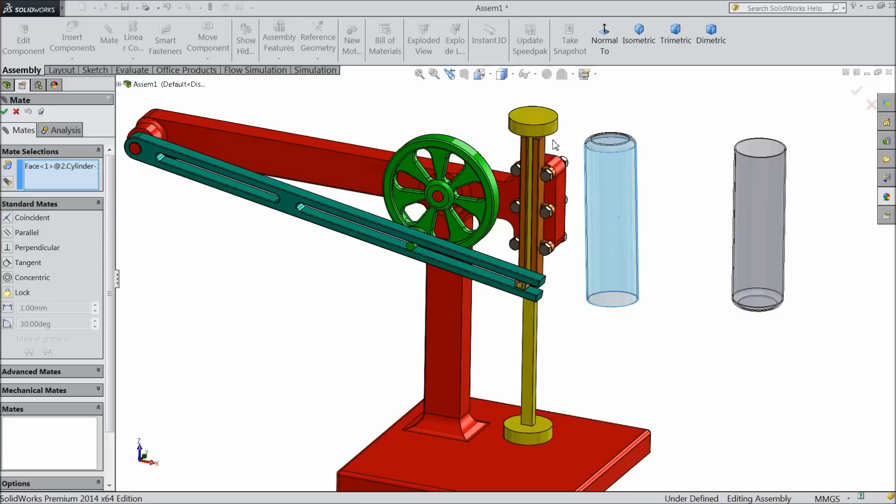Move up and this one move down. Make relation for this also, this cylinder and this. Okay. Now this is already defined. Distance you can choose anything. Now let's move. See, our return mechanism is moving. Make cylinder little down. So this is our mechanism, 4-bar quick return mechanism. We assembled each and every part here.

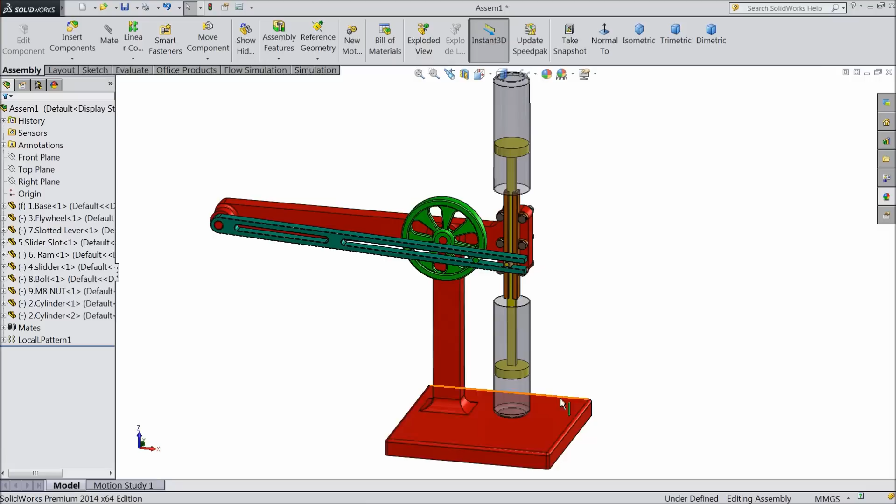Now we will do the animation for this. How will we do the animation? Let's go. Select right plane, right click on this taskbar, choose motion manager, go to motion. Now see it's going to this. Select this upward. Now drag this up to 10 seconds. This one keep 30 mm.

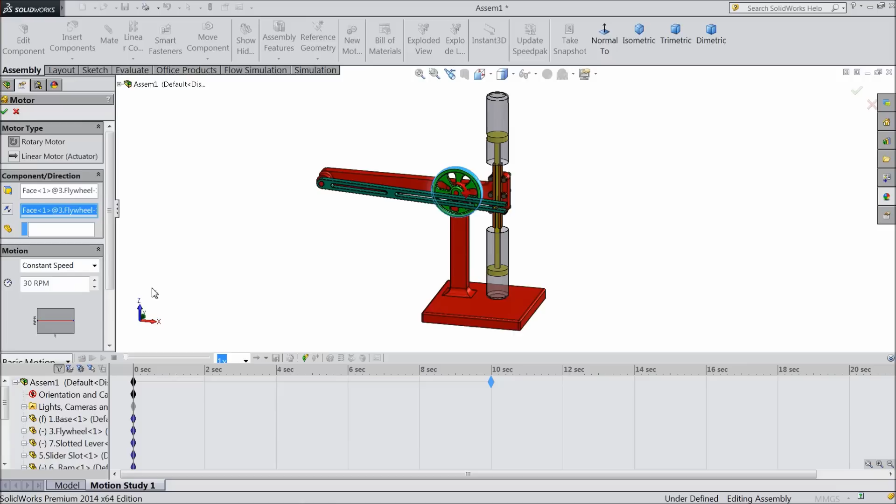Select OK. Just drop down this and select calculate. Now it is calculating. Now let's play. See, it is playing. 4-bar quick return mechanism.